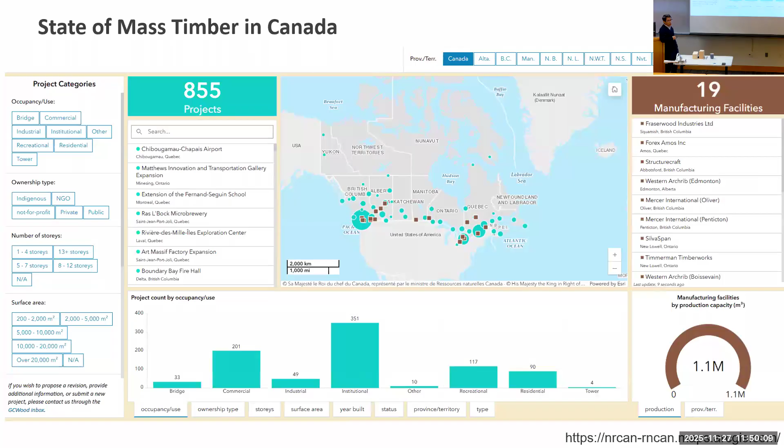This gives us the overview of the picture. You'll notice that more than half of these over 800 mass timber projects are actually located in BC. So we are the leader of mass timber application across the country and also around the world. The rest are mostly in two provinces, Ontario and Quebec.

Among all these mass timber buildings, over 300 projects are institutional buildings, including UBC as a post-secondary education institution, and also high schools and elementary schools. The main reason is the mass timber application is also driven by the government. In BC, we're familiar with this Wood First initiative, which eventually pushed the trend of building more mass timber structures in the public funded domain.

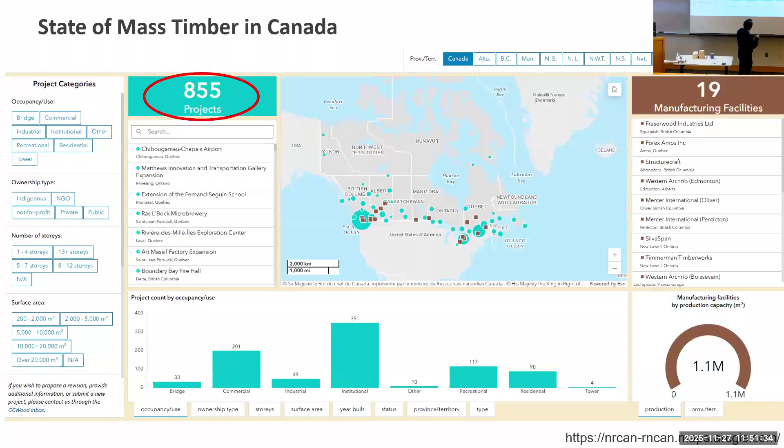This is a close-up of that map looking at the UBC community. We have a total of 19 projects, including this particular building, the forestry building. We look up the low roof structure here, made out of beautiful parallel PSL products. And also we have the iconic UBC Brock Commons Tallwood House, an 18-story student housing building. So we can see UBC is more like a museum showcasing a collection of mass timber structures. If we walk around our campus, you will see quite a few beautiful mass timber buildings.

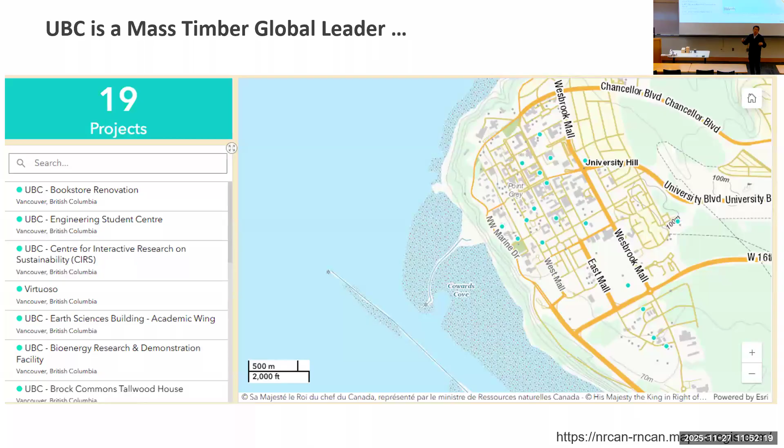This particular building, when it was completed in 2017, actually set the world record for the world's tallest modern timber building, using modern engineered wood products. A lot of glue-lam and CLT have been used in this building.

I want to emphasize modern timber building because in Asia, for example in China and Japan, there are historical religious pagodas taller than this Brock Commons building. Brock Commons is about 54 meters total height, while the tallest pagoda in China, built over 1,000 years ago, is about 65 meters tall. But this building really showcases modern construction.

UBC is really leading in mass timber application, and we want to build more buildings using mass timber, which is considered a sustainable construction material compared with concrete and steel.

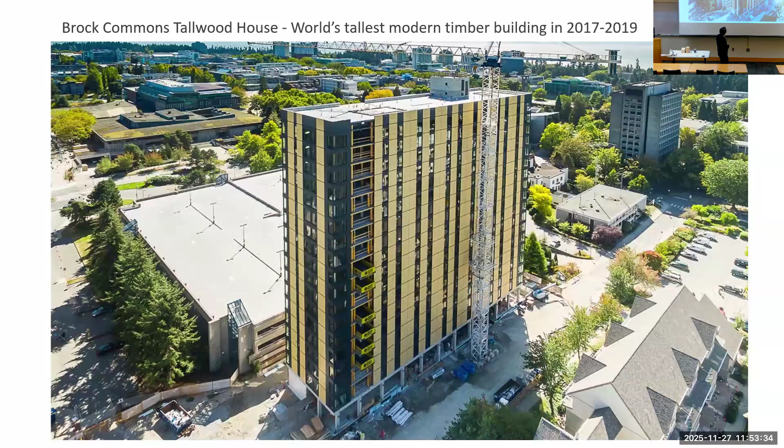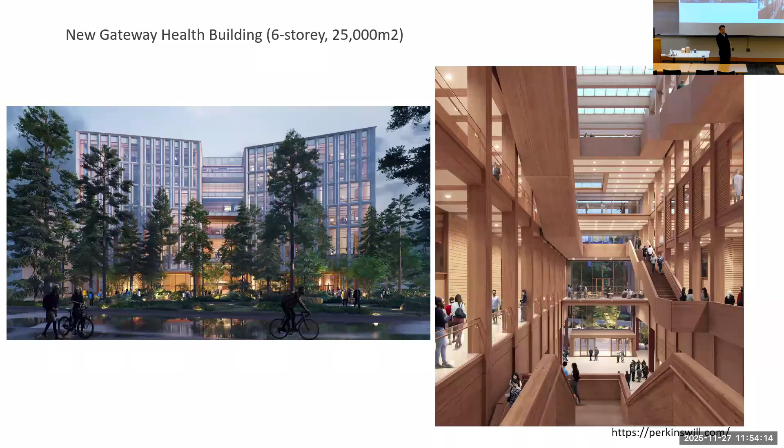Another new building is currently under construction, near completion - this is the new Gateway Health building on University Boulevard. Once completed, early next year, it will house the School of Nursing and the School of Kinesiology. This building has a total of 25,000 square meters of floor area, similar to our Forestry building including the main building and the courtyard area. It's a massive building using a lot of glue-lam and CLT.

I mentioned UBC is a museum of mass timber buildings, so I just picked some of these buildings as an example. Obviously my favorite building here on campus - the nice atrium in the Forestry building, beautiful truss system, with these PSL columns supporting the roof system.

Don't forget, this building was built in 1998. That really tells us we had a long history of trying to push innovative solutions using mass timber on this particular campus.

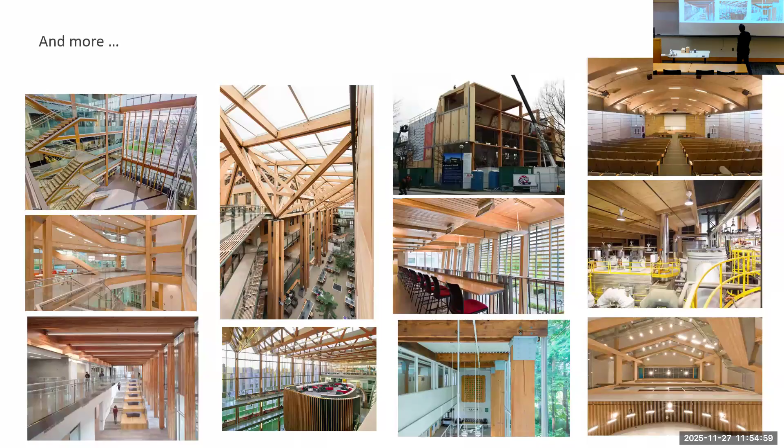We also have a very strong timber product industry. The government website shows that across the country we have 19 manufacturing facilities, and the total annual production capacity of these 19 facilities for mass timber products is slightly over 1.1 million cubic meters - just to give you some idea about the amount of engineered wood we can produce. 1.1 million, that's quite a lot.

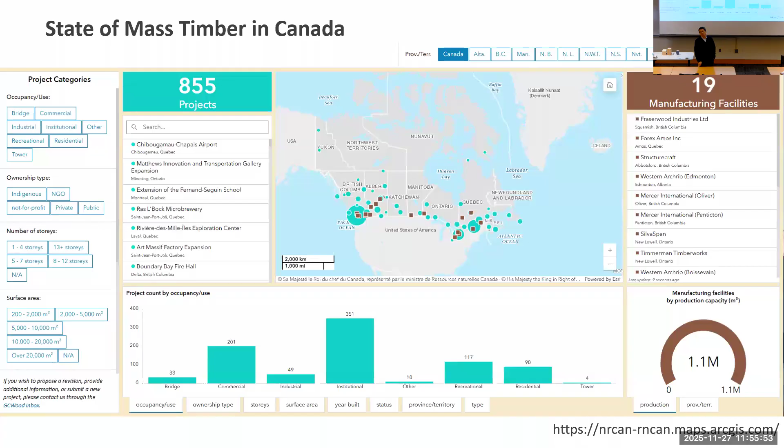For the 18-story Brock Commons building, the total volume of engineered wood used is slightly over 2,000 cubic meters. So that means we can really build a lot of high-rise buildings with our current production capacity in Canada.

Those 19 manufacturing facilities are able to supply high quality mass timber products, and obviously the most popular ones currently are CLT, cross-laminated timber. This is a game changer for the mass timber industry around the world. CLT was originally invented in Europe. And of course Glulam, which consumes the most significant market share in the mass timber industry.

We use a lot of Glue-Lams, and this is not a new product - Glulam was invented over 100 years ago. We also have other engineered wood products like nail laminated timber. If you go to the UBC bookstore, look up - the ceiling and floor system is made out of NLT, nail laminated timber. And at the Orchard Commons dining hall, they also use DLT, dowel laminated timber from StructureCraft, for some of the ceiling products.

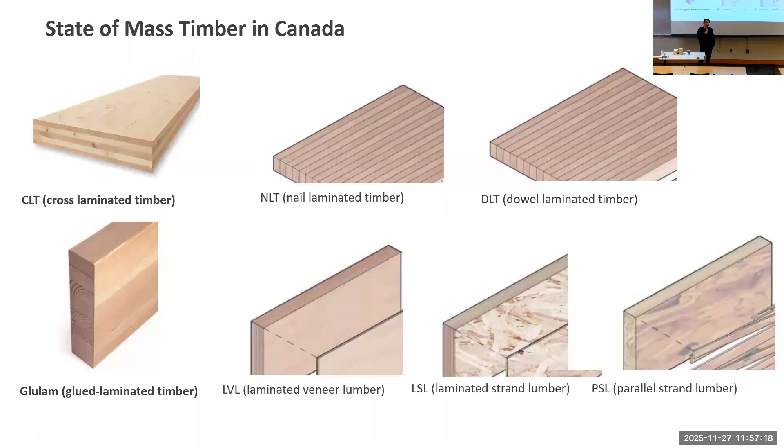There are other types of products too - LVL, LSL, and PSL. PSL is what you see here. These are all very high quality and highly value-added engineered wood products.

I don't have to go through the whole production cycle, but we understand that Glulam is essentially laminated structural boards along one major direction, so all the wood fibers are oriented along one major direction. We often use Glulam for frame structures, for beams and columns.

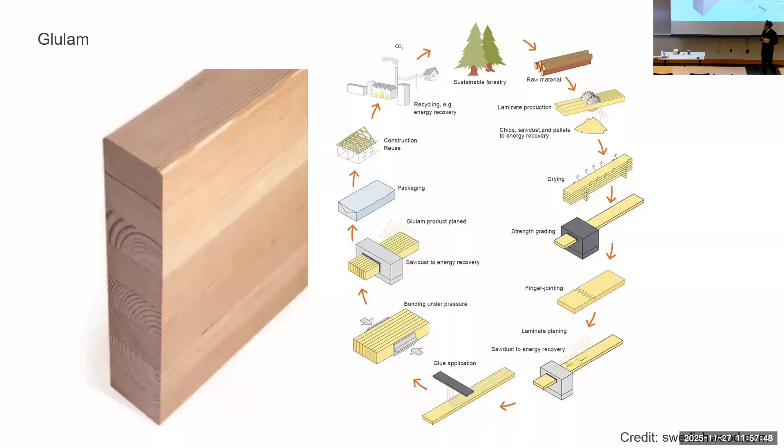For CLT, I would say it's sort of like plywood on steroids. Instead of using thin veneers, we are using dimension lumber, and then laminating them in a crosswise manner. Of course we need to apply adhesive on the surface, most often on the wider surface.

CLT panel size is limited by transportation and also by the CLT press in the plant. Early this year we visited Kalesnikoff, one of the major CLT producers in Canada. Their press is able to press 10 feet wide up to 60 feet long CLT panels - about 3 meters wide and 18 meters long, up to almost 0.4 meters, so over 1 foot thick.

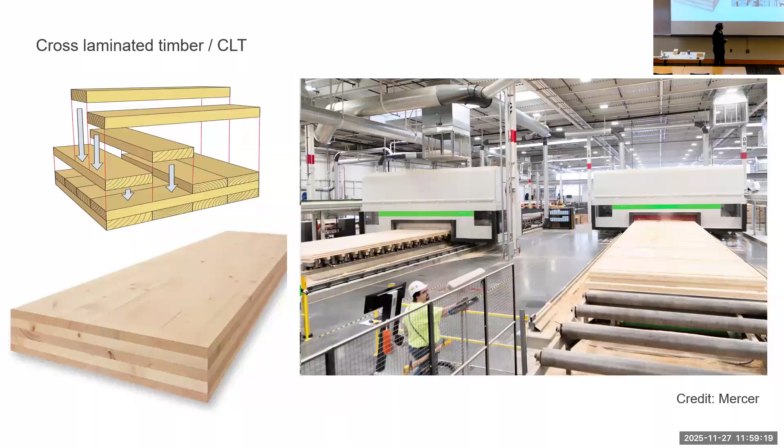Imagine these kind of panel sizes can be used to replace the conventional concrete slabs in buildings, used as floor slabs and wall panels, etc. We do have really strong industry support to produce this kind of high quality mass timber product in BC. Now I want to touch on the type of connection systems used to assemble mass timber components to form a building structure.

We are mostly relying on mechanical fasteners together with steel plates to assemble large mass timber components on the construction site. Occasionally we also use glued-in rods, essentially using adhesive to transfer forces between the mechanical fasteners and wood members. But mostly we are using relatively large diameter fasteners like coach screws, dowels, bolts, and also long self-tapping screws.

The dowels and bolts can go up to almost 1 inch in diameter, often used in mass timber construction. The long self-tapping screws are much stronger than the normal wood screw, made out of hardened steel. The yield strength can be 3 times higher than normal structural steel, for example this can go up to 900 megapascal yield strength.

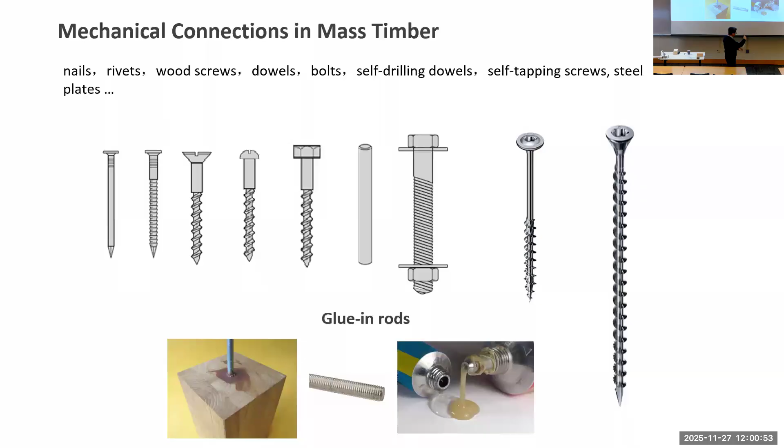They also come in different diameters, often from 6 millimeters to 13 millimeters in diameter, and different lengths, shorter ones and longer ones up to 1 meter long. They offer really strong connection solutions for us to build mass timber structures, because we have to deal with high forces when we build taller and larger mass timber buildings.

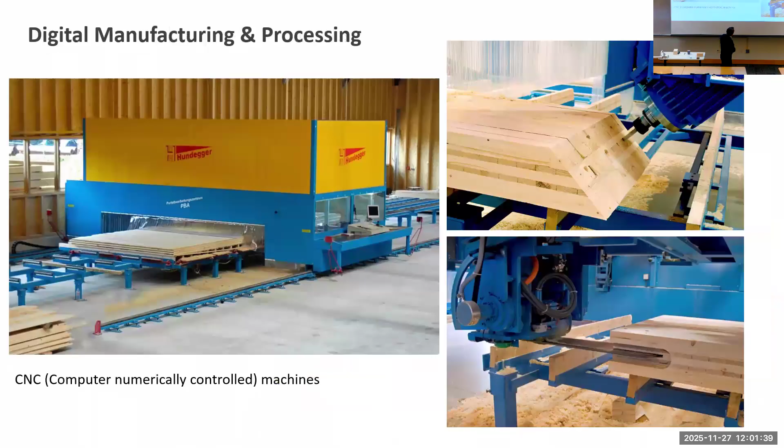Fortunately we now also have digital manufacturing processing machines. For example, in the CAWP lab we have these CNC wood processing stations that can be relied on to make very accurate cutting and drilling. Therefore, on the construction site we will be able to put those mechanical fasteners in very easily and accurately. This just showcases some of this manufacturing processing.

We can prefabricate some of the joinery for these large members. Imagine in this case, we have two knife plates sticking into bigger glulam members, and then we have to drill all the holes accurately using the digital fabrication equipment. Then on site we can get these fasteners into those holes in an accurate manner.

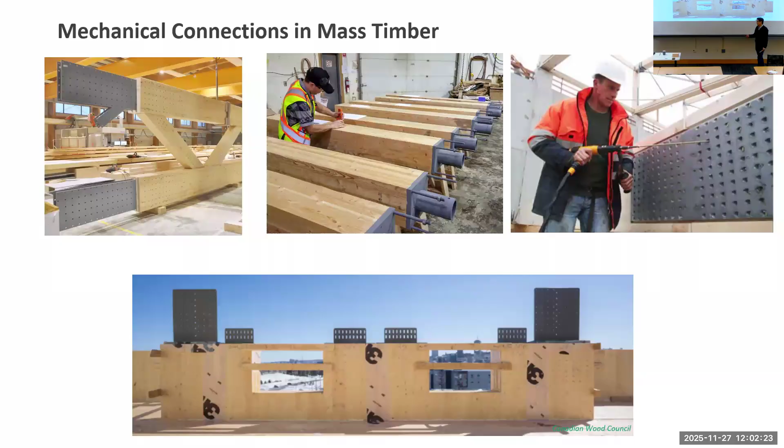These photos were taken from a 12-story CLT building built in Quebec City. Look at the size of these knife plates — you have to have very accurate machines to do the work.

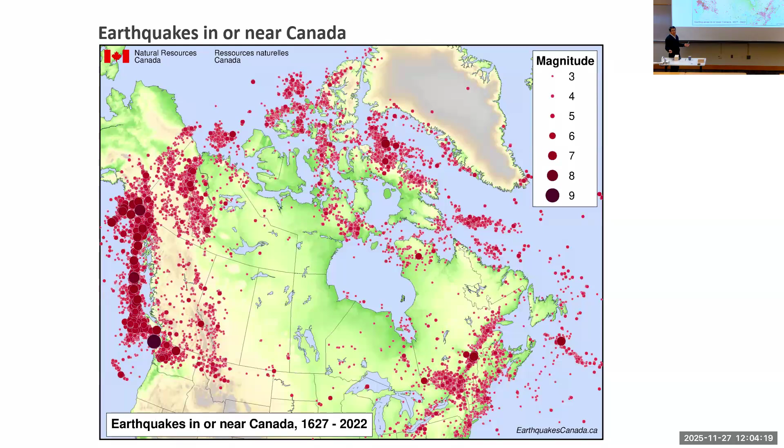Earthquakes are there, it will happen. We don't have a crystal ball to predict when it will happen, but we look at this historical data.

We are aware of this, and that's why in the recent British Columbia Building Code of 2024, we significantly increased the seismic design forces for our building structures, really to try to lower future risks. With the increase of seismic design load, for typically low-rise buildings it's a 25% design force increase.

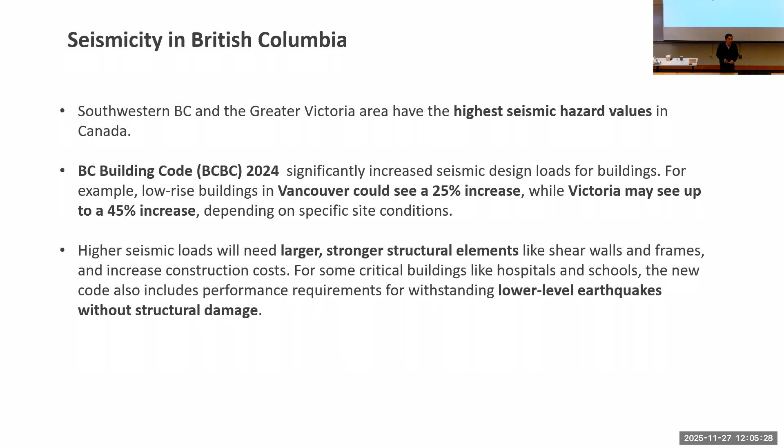In the Victoria area it's even worse, you may see up to 45% increase of the design forces. With this amount of increase in design forces, that actually creates a significant challenge for engineers and architects, because you have to put in enough strong structural elements to resist the earthquake loads. And that may limit the architectural flexibility of the floor plans, etc., and of course increase the construction cost.

The current seismic design philosophy around the world has specified 3 criteria. For minor earthquakes, we don't want to see buildings having any damage.

I remember a couple months ago we felt a bit of shaking when I was eating lunch in my office. I would say that is a minor earthquake. You feel the shaking, but I remember Greg was looking around checking for any damage, and there was no damage. So what is your conclusion? No damage, right? I didn't know that until I went... oh you didn't know that? Yeah, probably we are on level 4, so the taller you are the more you feel it.

Moderate earthquakes: we expect some level of damage, but it should be repairable, so you're not going to spend a lot of money to repair that kind of damage. For example, on a moderate earthquake, you may see some cracks in the drywall. It's more like appearance, and it really doesn't affect any structural performance in future earthquakes. Therefore, it should just be repaired.

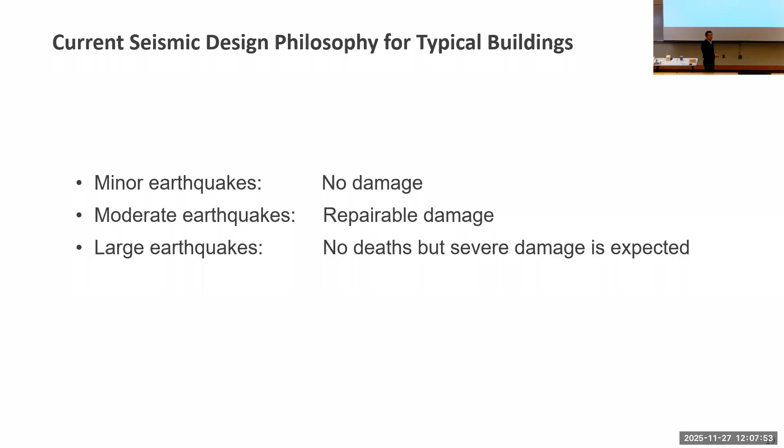Next I'm going to show you a few slides taken from the Canterbury earthquake that occurred in 2011. It's a big one with magnitude of 6.2, and the epicenter of this earthquake is so close to the city center of Christchurch, only 12 kilometers away. That triggered very strong ground motion.

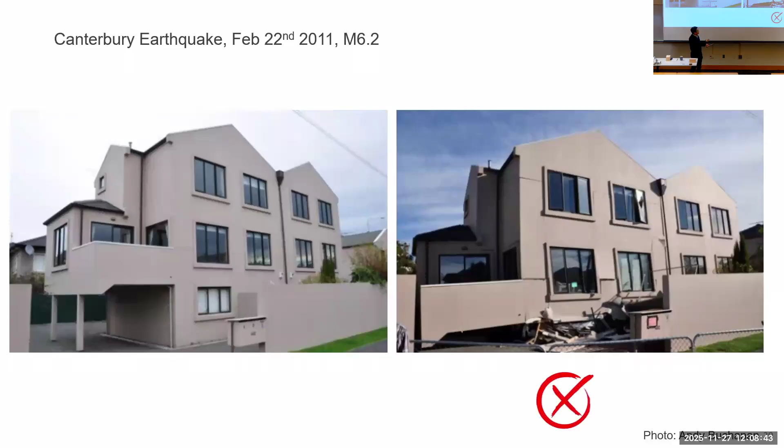So you look at this light wood frame duplex. Originally it's a 3-story duplex. Oh, it pancaked - the whole ground level is gone, because of the soft story issue. So what is the performance criteria we mentioned? It's life safety protection. So obviously, it's a failure.

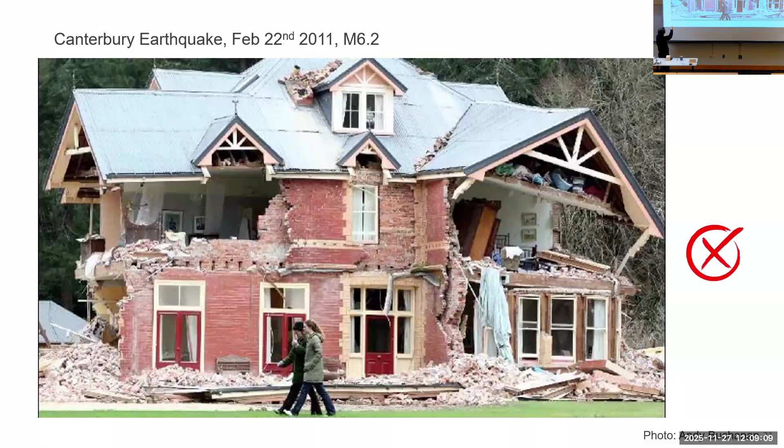Look at this building, it's the old-fashioned unreinforced masonry building. In the Canterbury area, there were still quite a few of these types of buildings, built by early European settlers, mostly from England. So partially collapsed - obviously not good. Not full collapse, but partial collapse. Look at this side of the structure - nobody died. The iconic Christchurch Cathedral partially collapsed as well, which is no good.

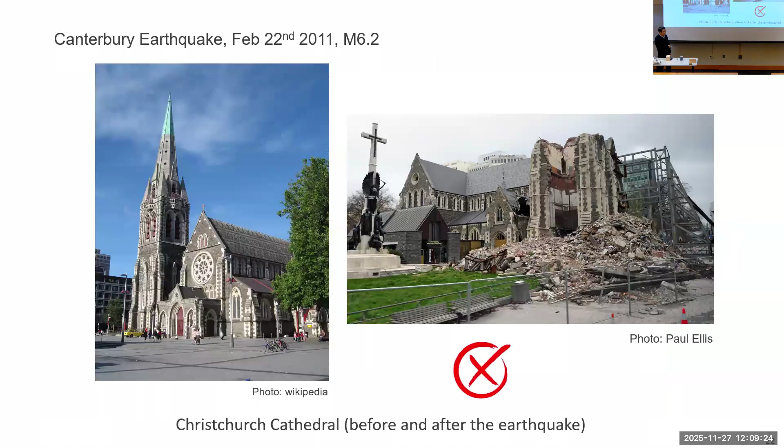This is the worst, okay? This CTV building basically completely collapsed, and this particular building killed over 115 people. Very sad story - all sorts of reasons eventually led to the whole collapse of the structure.

Design problem, design deficiency, and also construction quality control. So the post-quake investigation basically identified why this building, this concrete structure, collapsed.

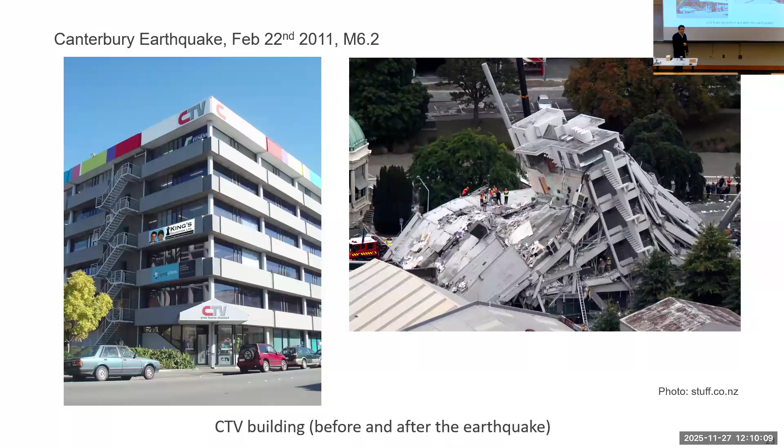Total failure. What about this - another hotel building in the city center of Christchurch. It didn't collapse, but the post-quake inspection found there was extensive damage in this building, such as the damage at the end of the concrete beams. We call this plastic hinges - basically the rebar has yielded a lot and the concrete layers are spalling, etc.

So what do you think the performance is? Yes, it's good. But I tell you what, this building is gone, just because it's too expensive to repair this extensive damage. So eventually, with insurance money, they demolished this building and built a new one, because it's more expensive to repair this than to build a new one.

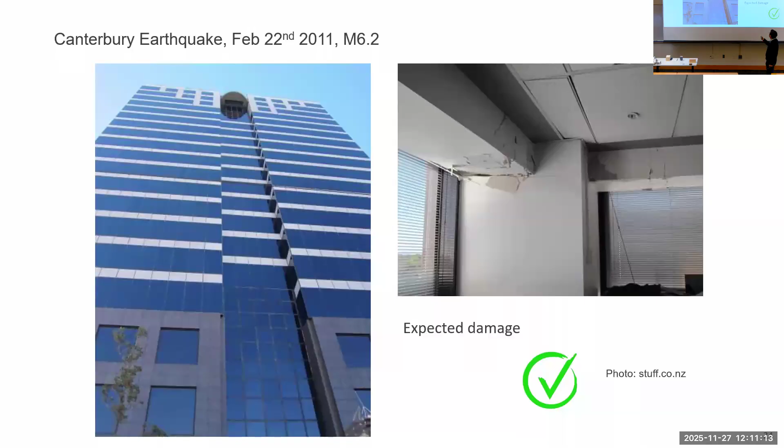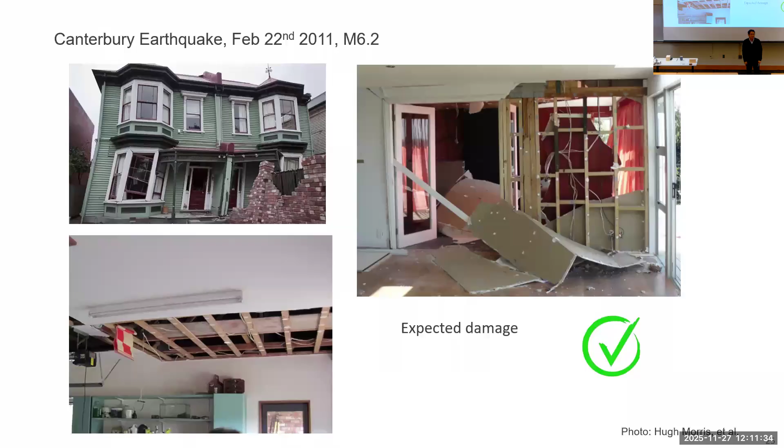Thanks, Rob. So we know this is the ground motion. Earthquake will trigger ground motion, and the ground motion creates problems, right? So what's going to affect the intensity of the ground motion?

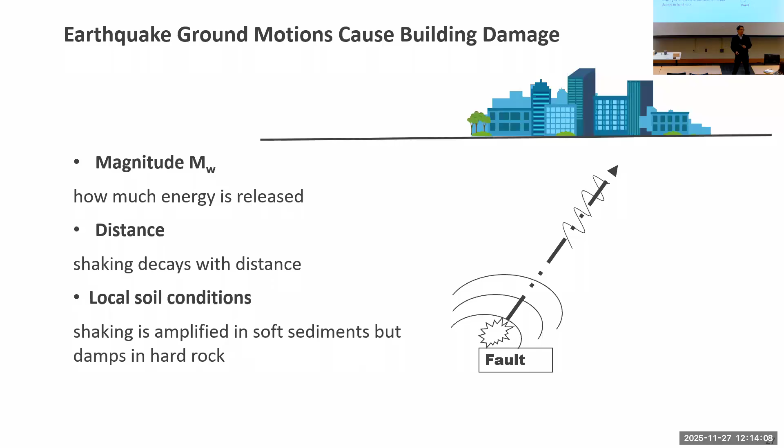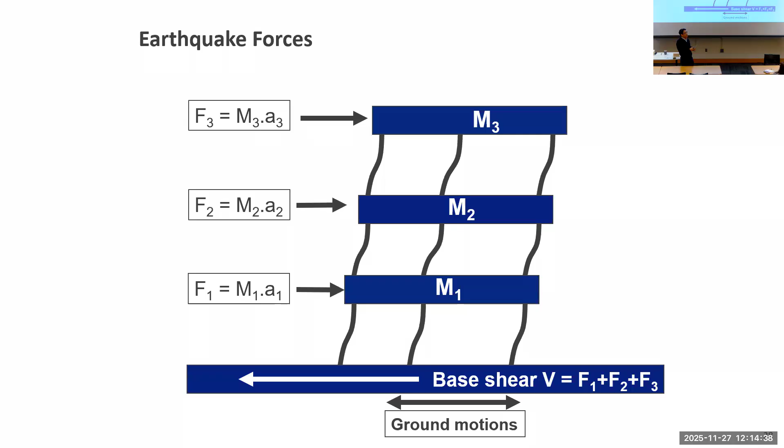We have to go back to refresh our memory on high school physics, Newton's second law: mass times acceleration, the inertial forces we design against for buildings. In this case, for a 3-story building, we need to calculate the seismic mass of different levels and estimate the amount of shaking, the acceleration. Then we can find out the total forces we need to design against.

Looking at modern timber buildings, mass timber buildings, we can come up with different systems to resist earthquake load: mega truss system, braced frame system, moment resisting frame system. Moment resisting frame system means we have to design the beam column joint connection very strong and stiff to resist the moment action. And often in CLT structures, we see these shear wall systems.

We can have a platform CLT system, or we can have the balloon type of CLT shear wall system - I'm going to explain that later. Platform means these wall panels are not continuous along the building height. So at each level, on top of the wall panels, you have the CLT floors, and then you do this again. So the walls are not continuous.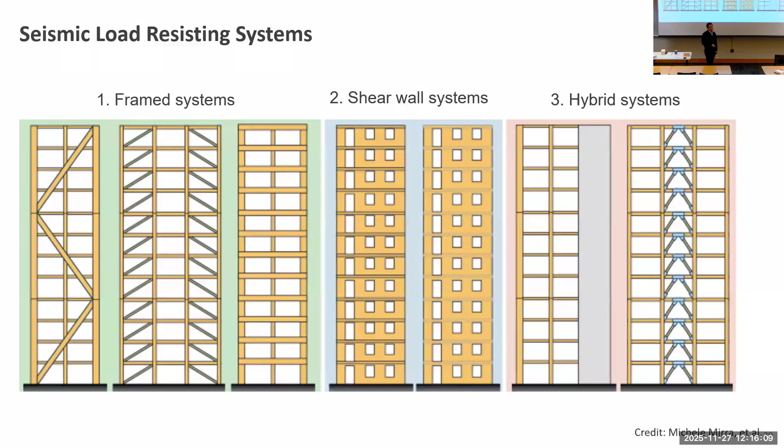UBC Brock Commons house uses concrete cores to resist earthquake load and wind load, lateral load. And we also often see people use steel frame systems - it's a hybrid solution as well. The Earth Sciences Building on the Main Mall uses this braced frame system.

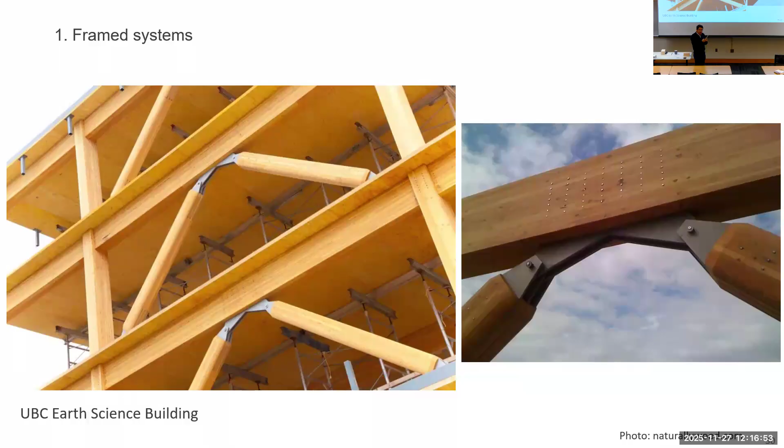I don't know if you are aware of these chevron or K braces - these are the most critical components in those buildings to resist earthquake, because they form triangles to stabilize our structure. We know triangles are a lot more stable than a square or rectangle shape. And we use a lot of small fasteners, so the designers want to yield these small fasteners in a big earthquake, because this yielding is able to dissipate a lot of energy.

Balloon type wall system - this is a photo from the 12-story CLT building in Quebec City, showing continuous wall panels. But of course, as I mentioned, there's a limitation for transportation, so you often need to come up with mechanical connection systems to connect the lower panels with the top panels.

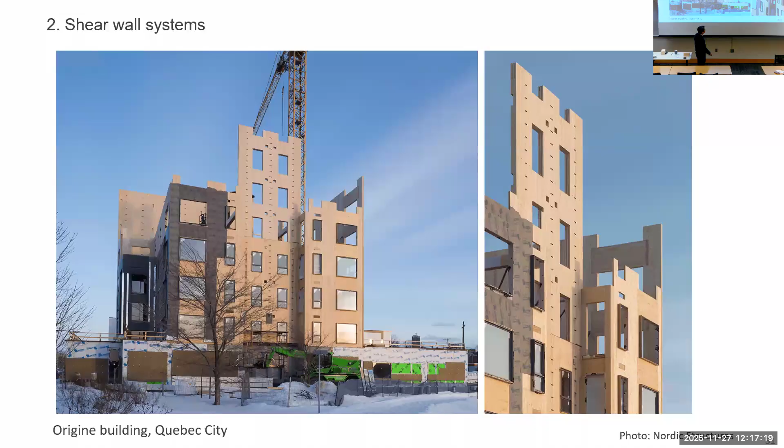Hybrid structures with concrete cores - we're familiar with this - and the BCIT tall timber student housing, recently finished, 12-story, uses steel frame structures to resist wind and earthquake loads. It's a typical hybrid system, right? The CLT floor panels and these braced steel frames - the floor systems are majority built with wood, and the braced steel frames resist earthquake.

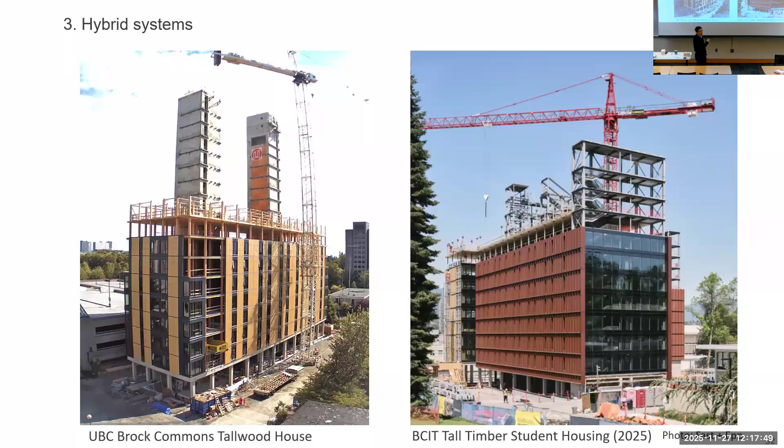Sometimes we can also see engineers try to introduce these high performance bracing elements - these are called BRBs, buckling restrained braces. They are commonly used in high seismic countries like Japan and the west coast of the United States, in California, mostly in steel frame structures, because they are able to dissipate a lot of energy under earthquake action.

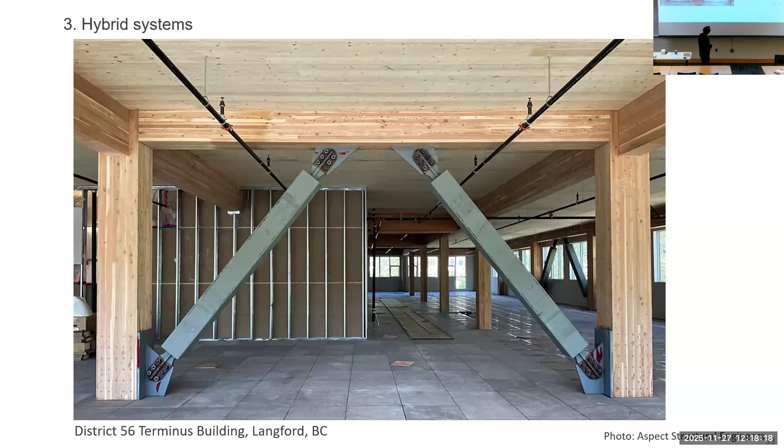My previous student, Wen Chen, also did some pioneering work on BRBs. It's a glulam frame with these BRB bracing elements. We apply the load on top of the beam to simulate earthquake action, pushing the frame back and forth, and we record the amount of load required to impose that level of displacement.

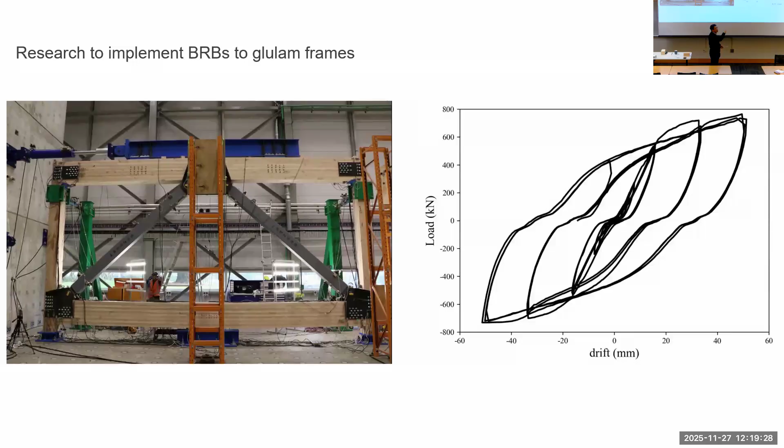We plot the curves between the load and the movement of the top beam, generating hysteresis loops. If you do seismic research on buildings, you will often see these kinds of loops. From them, we can find how strong the structure is, what the stiffness and ductility are, and what the total energy dissipation is. The area enclosed by these loops is essentially the energy absorbed by the system. Often we want to see fat loops, meaning more energy is dissipated.

In the last few years, I'm particularly interested in this balloon type of CLT shear walls. One of the main reasons is the current building code still doesn't have enough design information, so we needed to work on this to help deliver designer solutions.

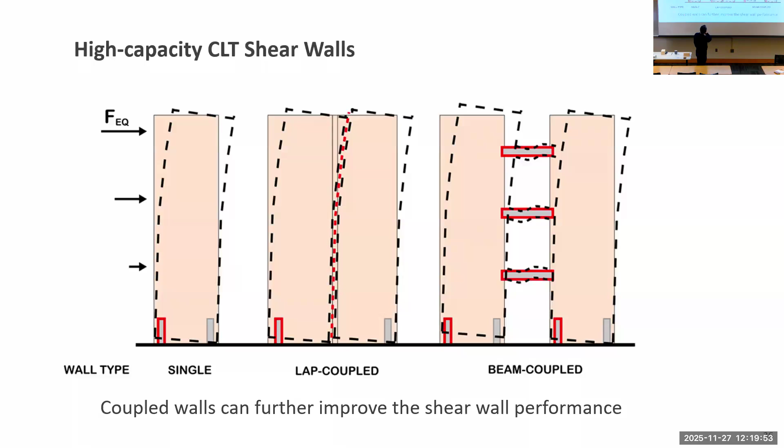We can have single walls, lap-coupled walls, and beam coupled walls. Again, we want to use self-tapping screws because they are easy to use on the construction site. With a normal power tool, you can install these screws, and you don't have to pre-drill accurately using CNC machines. Most of the time, we use these screws.

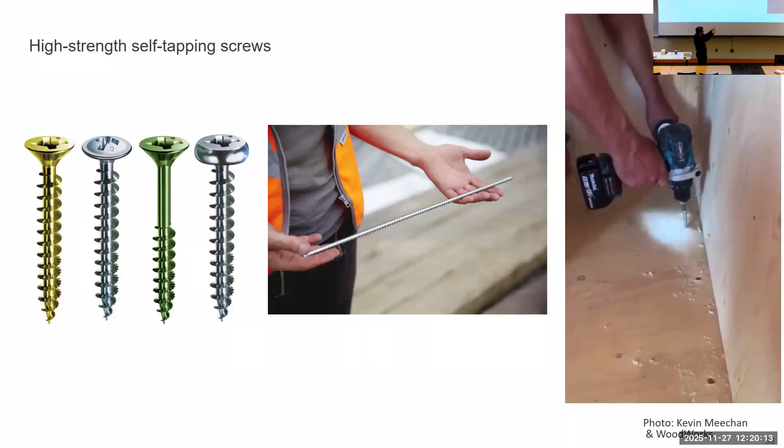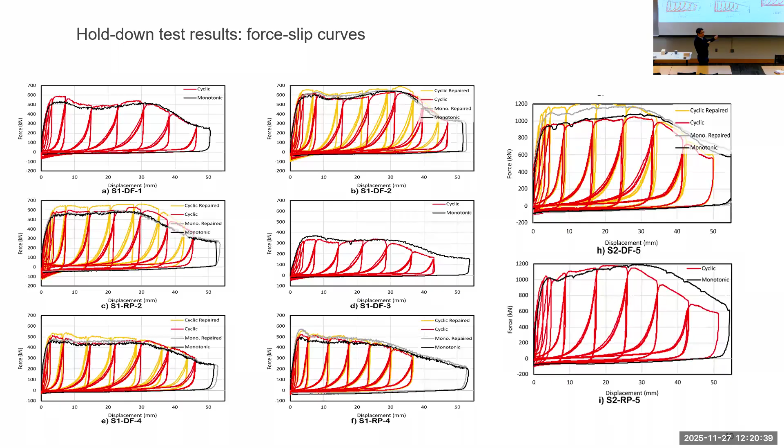This is the large-scale connection testing. We are looking at these particular hold-downs, anchoring these walls to the foundation. These are the hysteresis loops again. Again, we can dig out a lot of useful information from them: strength, stiffness, ductility, and energy dissipation. We also looked at repair.

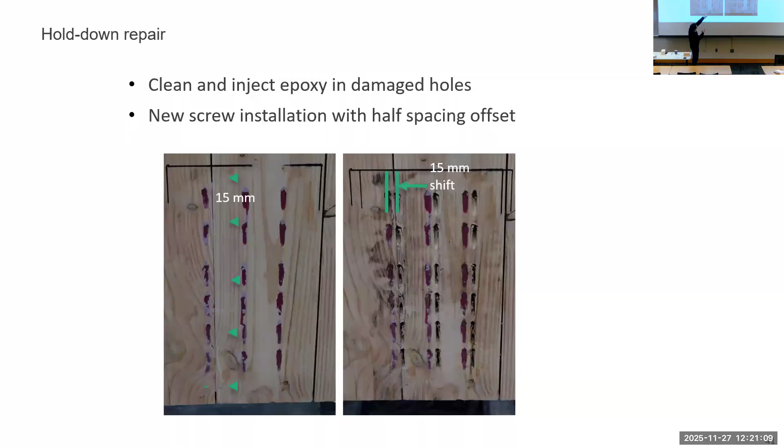I mentioned seismic resilience. We need to figure out how we can quickly repair these damaged connections after major earthquakes, because these connections are the major elements dissipating energy in a major event. We found we can quickly repair these damaged holes, fairly localized, by inserting epoxy into the damaged holes and placing new screws with a certain offset.

We test the connection again, and the performance is very similar, very comparable. It doesn't take a lot of time and effort to repair those kinds of damaged systems.

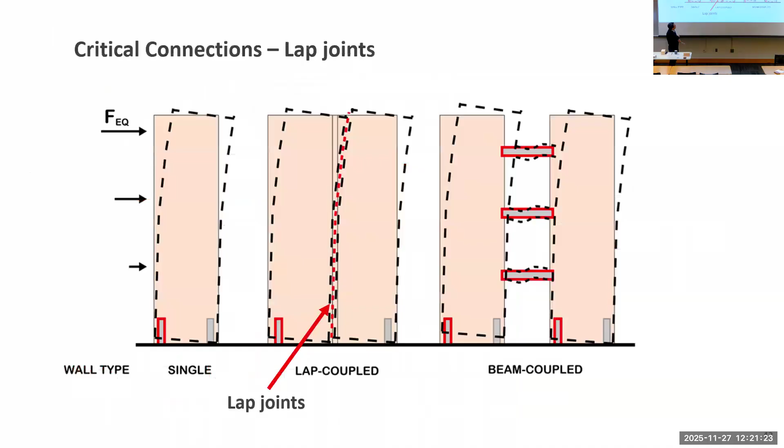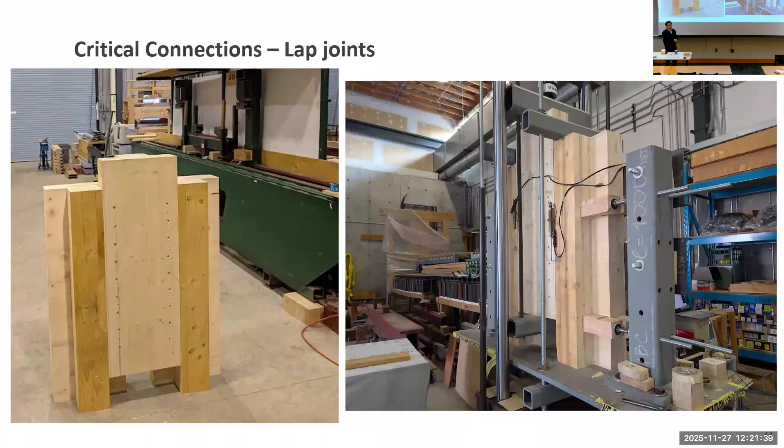Currently, we're also doing some testing in the lab to look at these panel-to-panel connections. In seismic design, we also want these panel-to-panel connections to dissipate energy. We've done some preliminary testing, thanks to Brandon for cutting these specimens. We do this testing also using screws to connect the panels, then look at the failure mode. Sometimes we see fracture failure of the screws along with significant local crushing of the wood.

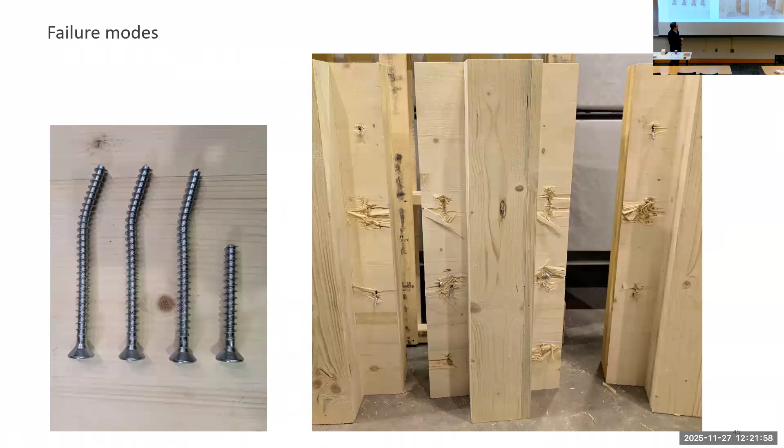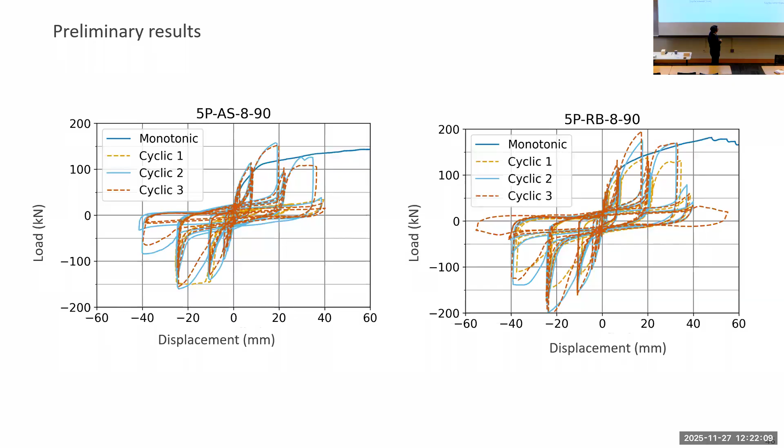This is the hysteresis loops we got, and this really provides useful information for us to evaluate how these connections performed under cyclic loading.

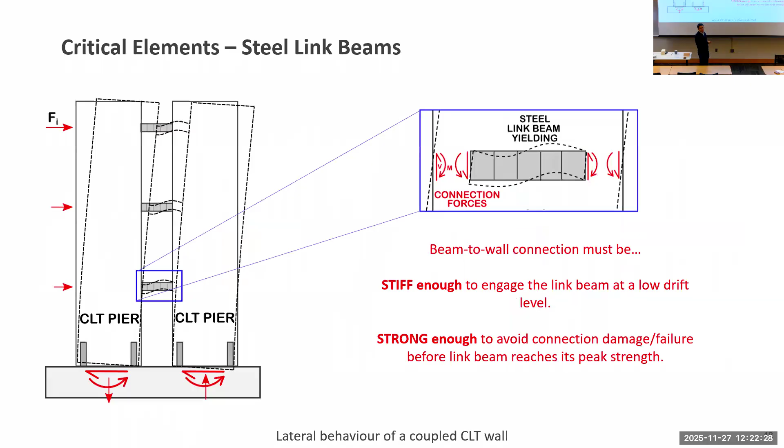The last one is to look at the beam system. We can use steel components to link up individual wall panels. By yielding these steel beams, we can dissipate even more energy for these buildings. We tested different kinds of connection solutions to make sure we yield these beams without damaging the wood.

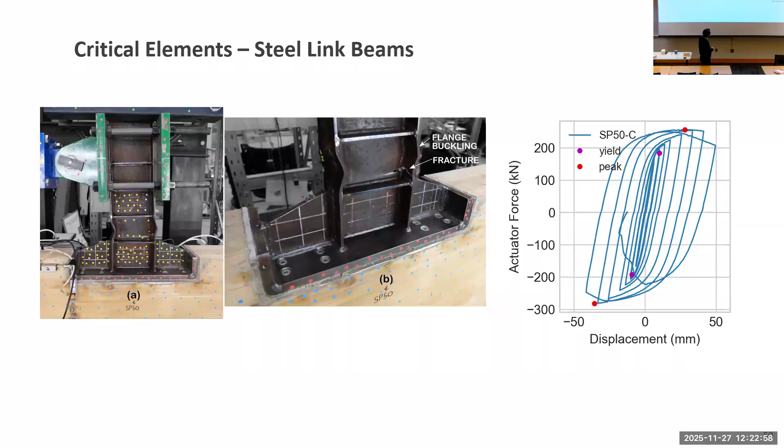This is fairly challenging, because these beams can be quite strong, and we have to come up with a strong and stiffer connection solution. Therefore, we only see the yielding of the steel beam. In this case, you have to think very carefully about how to avoid weakening the wood.

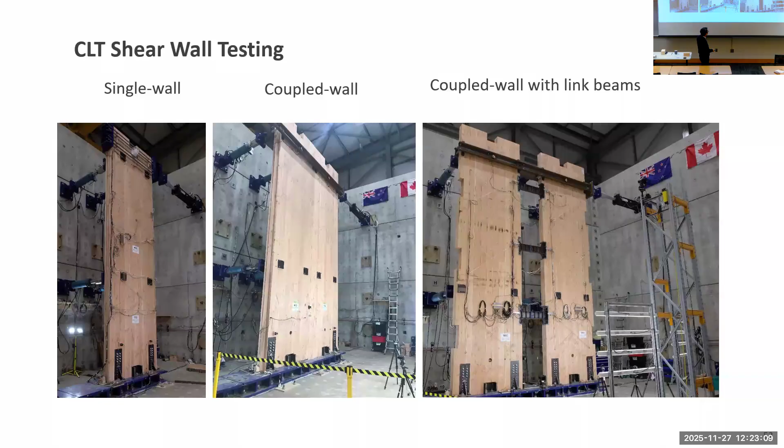So we do testing for the wall system now, understanding the component behavior and connection behavior. We look at the system behavior. I'm just quickly showing you some of these test videos.

This wall, to my best knowledge, is the strongest CLT shear wall ever tested in the lab. It goes up to 600 kilonewtons for the maximum base shear force, meaning this wall is able to resist almost 60 tons of force - 20 times stronger than the normal light wood frame walls used in our residential buildings. 20 times stronger.

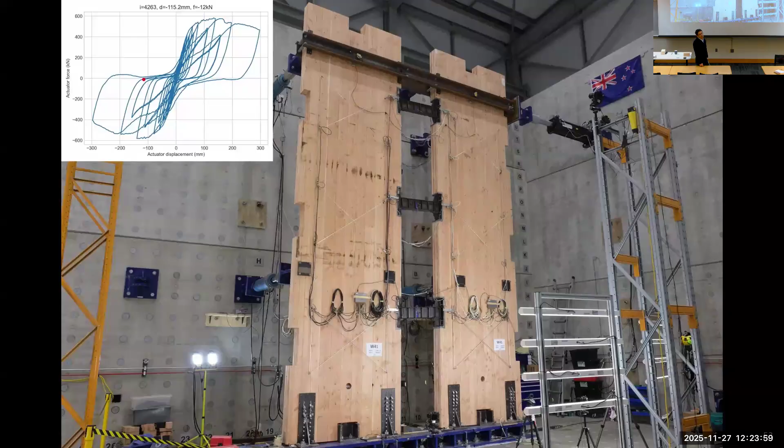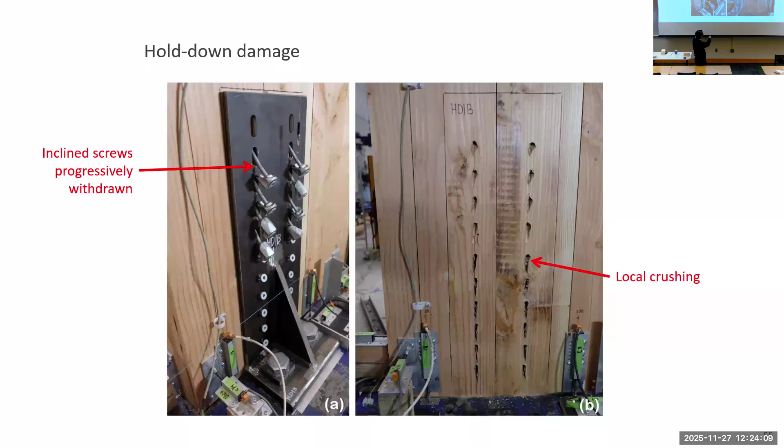We also looked at the repair: fixing all these damaged holes, replacing damaged steel beams, and testing the wall again using the same loading protocol. It's almost identical loops. This demonstrates the repair strategy works pretty well, and we are able to retrofit this wall system after severe damage and major earthquakes.

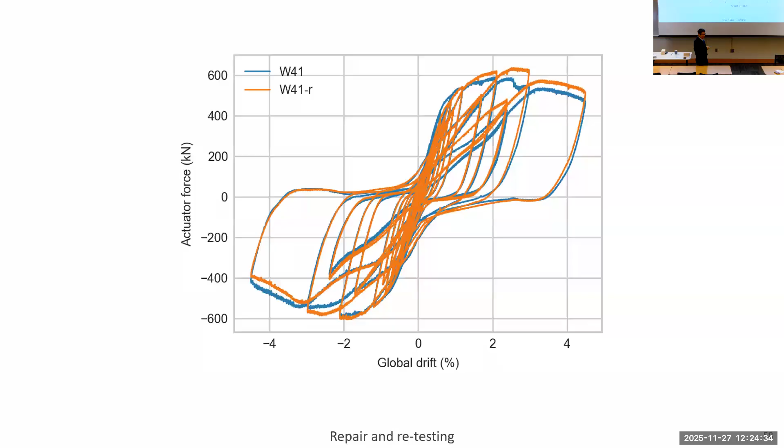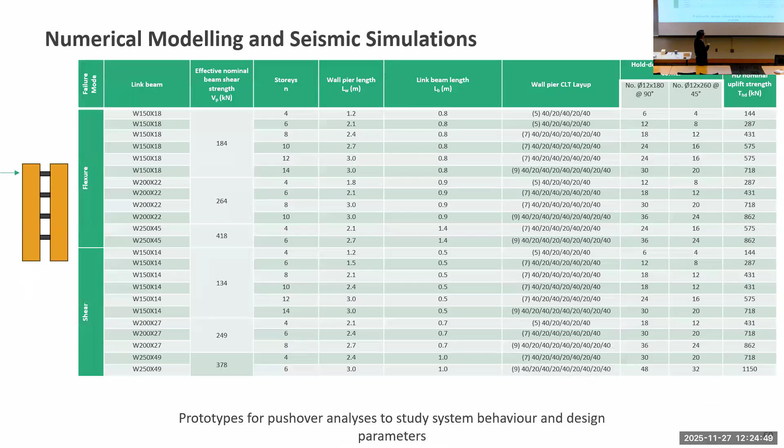We developed numerical models to look at applications for different heights of buildings, and different design geometries for these coupled wall systems. We also looked at using another type of hold-down technology - instead of those mixed angle screwed hold-downs, we're using high strength steel tendons to hold the structure down.

So the post-tensioning system is very interesting. It's a self-centering system, just a rocking mechanism, using high strength steel. Under earthquake action, they start to rock back and forth, and you see that the wall will bring back to its original location, and we can add sacrificial devices to provide additional energy dissipation.

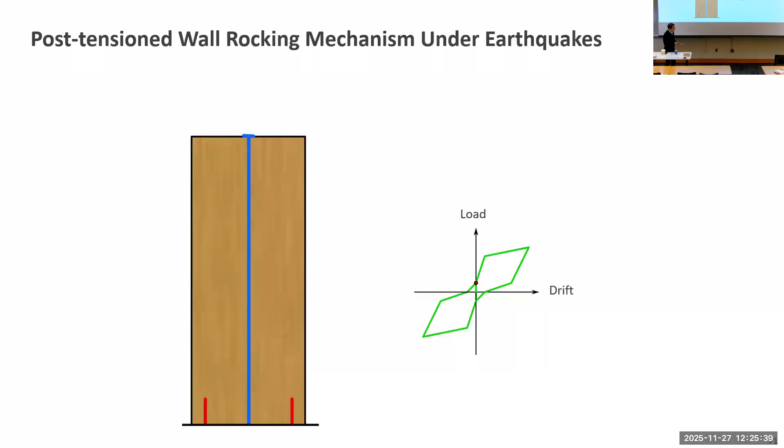So this is a new technology, the low damage seismic design technology, which has been used in a dozen mass timber buildings around the world, but not one in Canada. So we did this C-shaped post-tension wall testing using high strength tendons to anchor this wall to the foundation.

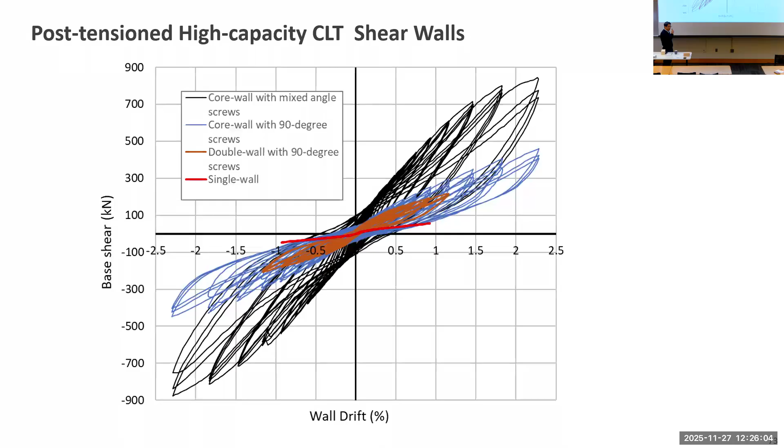And this is the hysteresis loops of those different wall setups. Again, the strongest over 800 kilonewton. It's a low damage design. We can quickly go back to replace some small components in the middle, and test it again. So these loops are essentially from the same wall panels by simply changing some of the connection details and replacing some of these devices.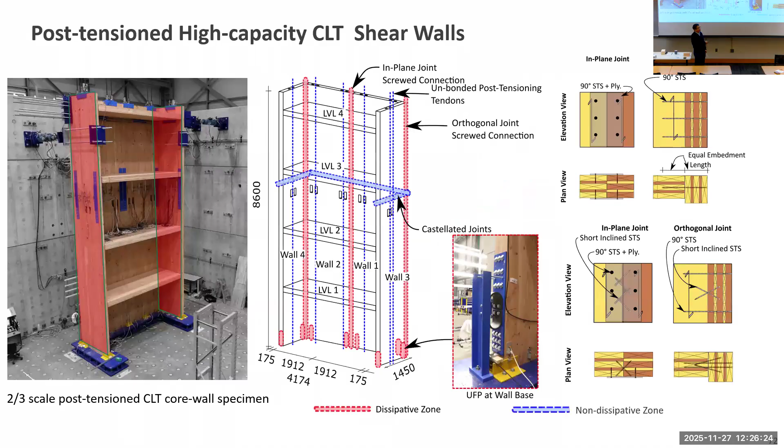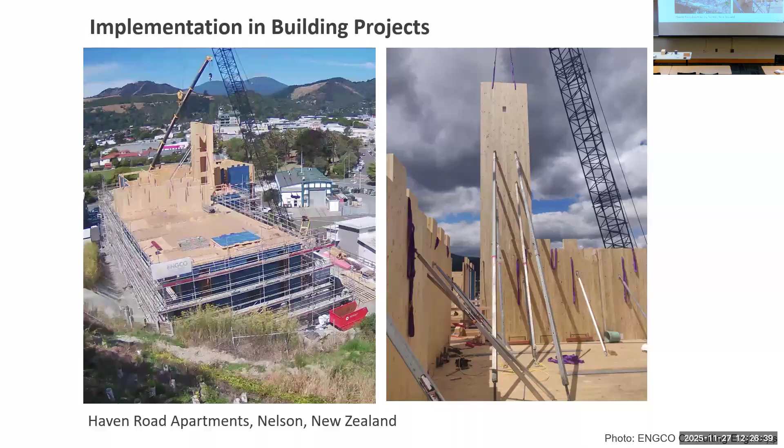The new technology we research has been implemented in real projects. So this is a 6-story CLT structure built on the South Island of New Zealand, a high seismic region, continuous balloon type of wall panels, using these mixed angle screw hold downs, and also these notched shear keys.

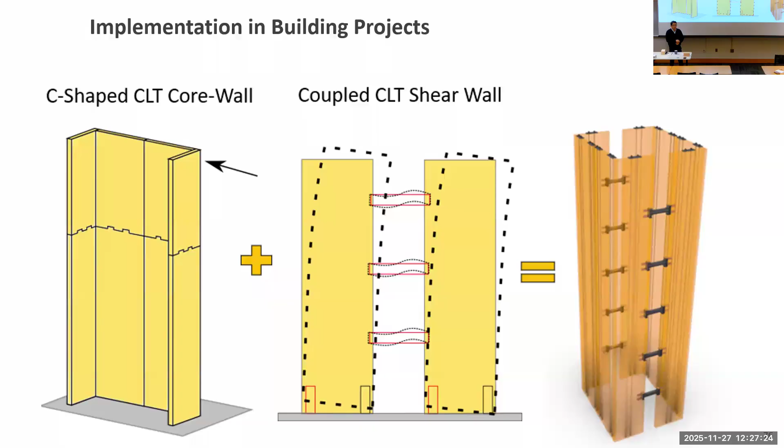Okay, so another more interesting project. We researched this C-shape wall system, or sometimes we call this a flanged wall system, because we have the 2 flanges and the web walls. We also tested this steel link beam coupled wall system. So what about the combination of these two to form an even stronger system for taller structures, and form a core structure like this for a timber tower? That's what we are currently doing with Structurecraft, the engineering firm, and also Michael Green Architects.

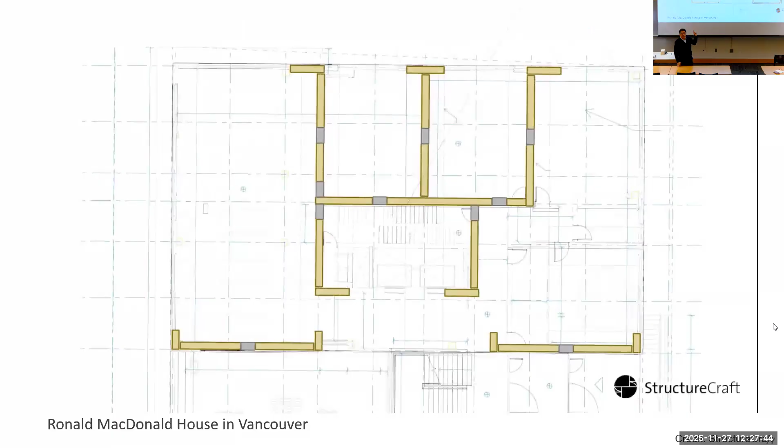So this is the Ronald McDonald House. It will be built in Vancouver on Willow Street near the BC Children's Hospital. Obviously, the owner is the Ronald McDonald Foundation. This facility is to provide temporary housing for families whose kids are receiving medical treatment in the hospital.

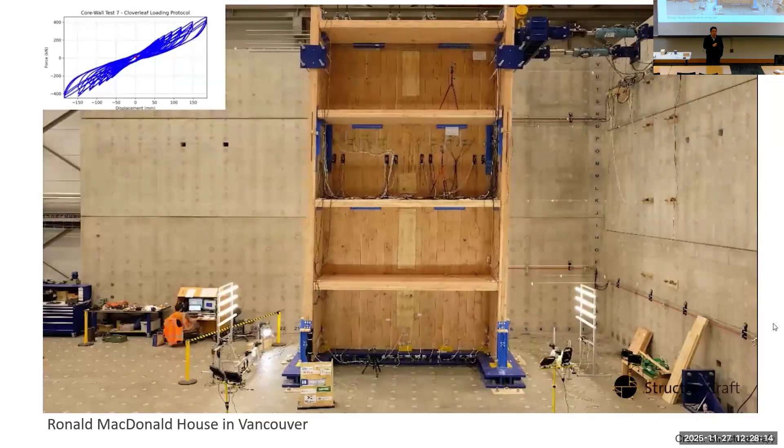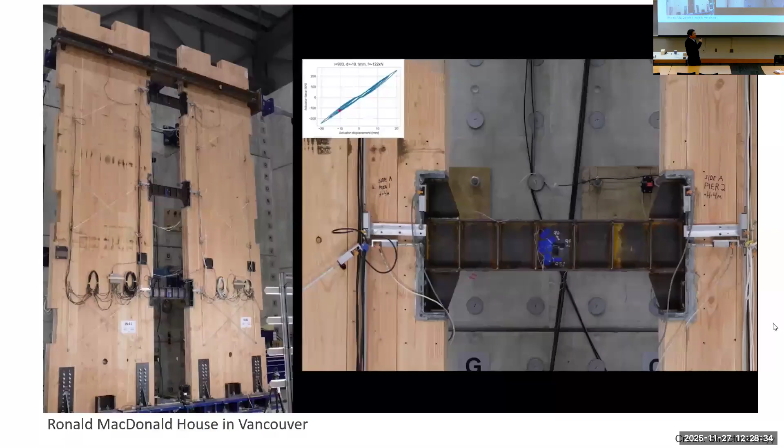So this building is about a $100 million project. The Ronald McDonald Foundation is still running fundraising to cover the whole project budget. The building will use these innovative solutions where my students and I developed for the tall timber towers. Structurecraft also received $1.3 million in government funding to subsidize the design of the structure because we are not trying to use concrete cores - we are using innovative mass timber wall systems for this particular building.

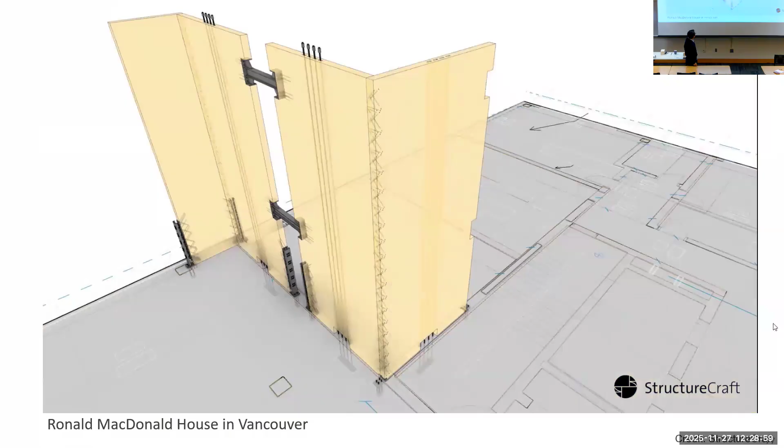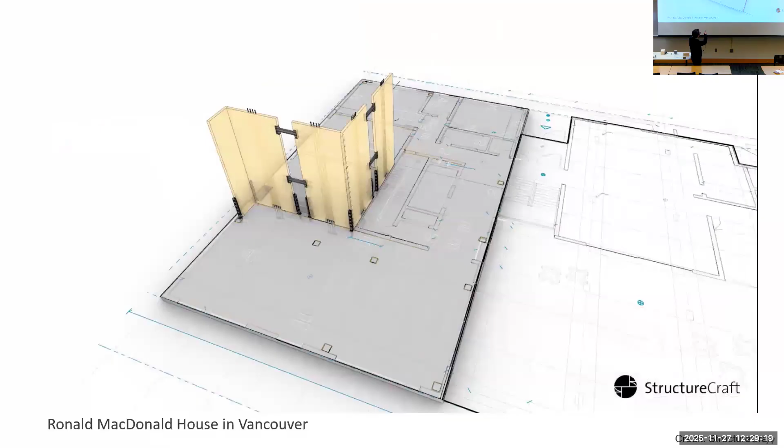These are additional energy dissipation devices. We use a lot of self-tapping screws to attach these devices onto the wall. And these are the post-tension tendons running through the height of the walls, anchoring them down to the foundation. And these are the steel link beams, providing coupling effect and also energy dissipation for this building.

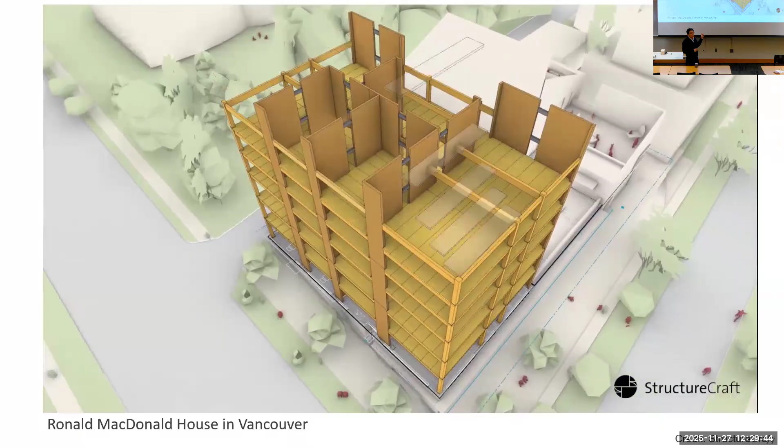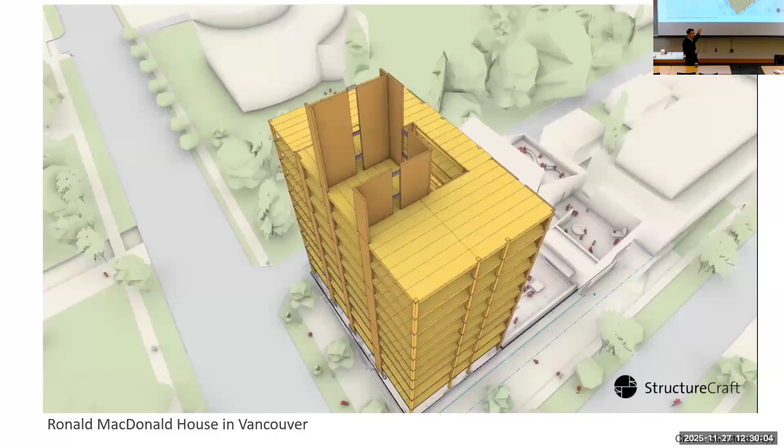So this is a really exciting project. Once the building is completed, it will be the world's tallest all-timber tower built in a high seismic region. We know in Quebec City we built that 12-story all-wood solution, but it's not a really high seismic region. A lot of focus for this building is to really think about how we're going to introduce a reliable energy dissipation mechanism, so we can lower the seismic design forces and make the wood use more economical and more efficient.

So I don't have to repeat this information - we know a lot is ongoing in mass timber research and application, and we are still facing design challenges in designing tall timber buildings, mid-rise or mostly high-rise timber buildings in high seismic regions. That's why we are using concrete or steel in timber buildings to resist wind and earthquake, because our design code, CSA O86, does not provide enough information for wood solutions to resist earthquake loads. That's why we still need to do research, and we still need to communicate with industry to come up with appropriate, affordable solutions.

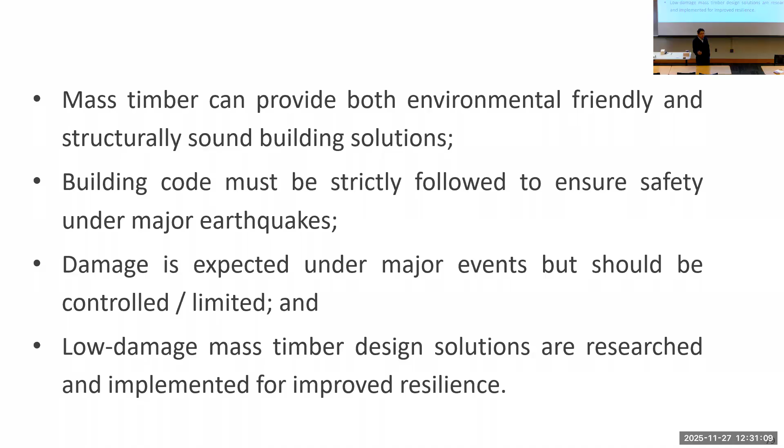I want to thank my previous PhD students Justin Brown, Wen Chandong, Ben Moerman, and Thomas Wright. Four of them are now all working in industry, and they are really experts in the design of mass timber buildings. My current student Killian is working on this lap joint coupled wall system.